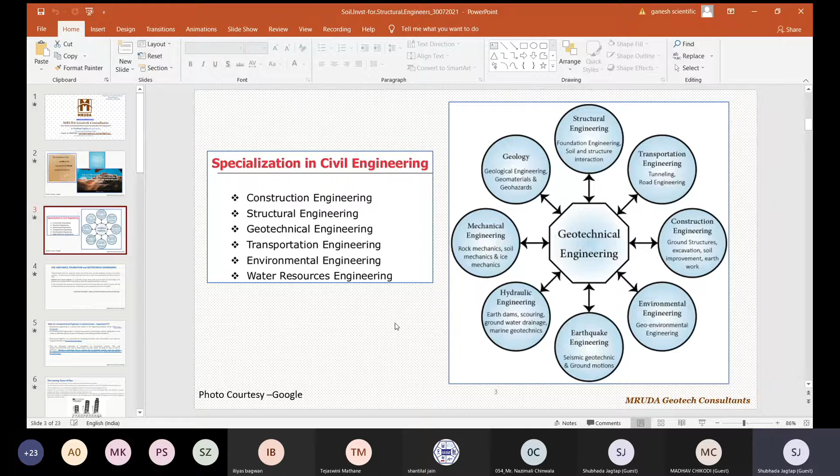So soil mechanics - engineer Karl Terzaghi is known as the father of soil mechanics and geotechnology. This is the base subject for geotechnical engineering, and he very well said that natural soil is never uniform, and to study the soil, it is not only the technical knowledge that you need, but your judgment and your skill sets are also required.

So yes, geotechnical engineering is a very beautiful subject and challenging too. Yes, geotechnical engineer's role is very much important in construction nowadays. In past few years, we saw many cases of failure all over the world, and at many places we came to know that proper soil investigation or proper geotechnical design was not considered, which led to further hazards.

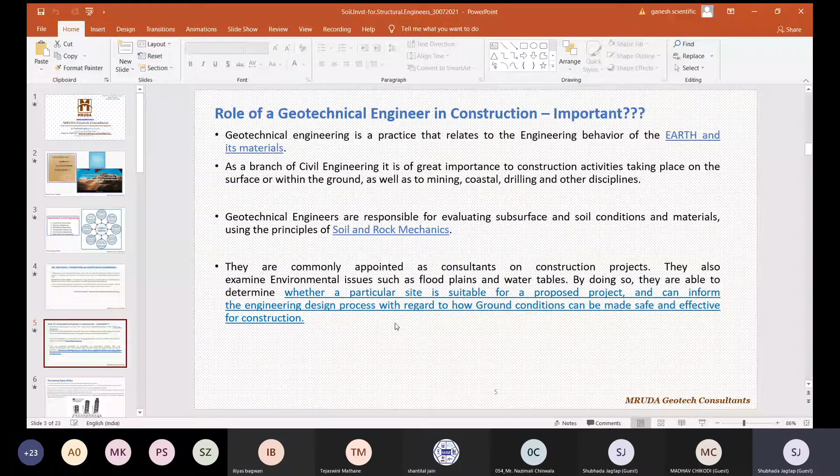Okay fine, so I will come to a very world famous example of the Leaning Tower of Pisa. Why? Because then we will move on to what was the soil stratum below as a foundation of this particular structure and why it tilted.

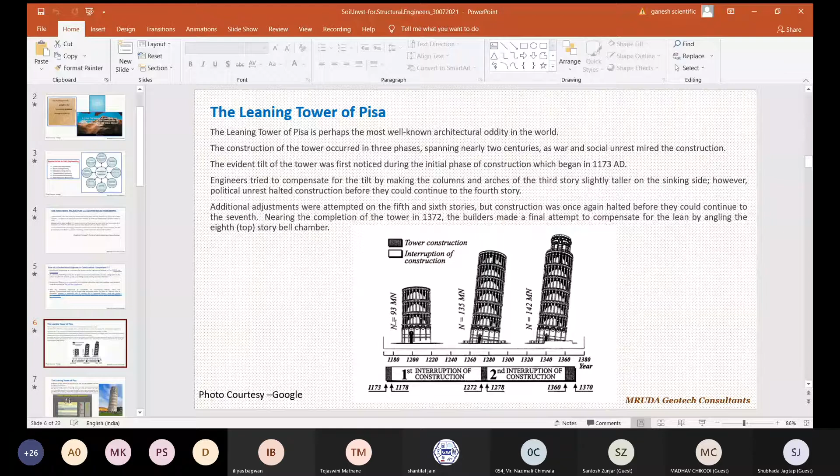So you can see the construction of this tower started from 1173 and ended at 1370. So over two centuries it happened, but in steps, because after building almost 3 stories it started tilting, and its tilting continued, and the engineers built it in stages over 200 years. Careful monitoring of this tower didn't happen till 1911, that is 100 years back. They gave real importance, and investigation started for this, how to stop it - at least it should not fall.

So if you see the subsoil profile and soil properties below this tower, you can see this Pisa, very well known tourist place in Italy, very near to the seashore. Your groundwater table is very high, sea level, and sandy clay silts, upper sands, which led to the settlements. So I would say that soil investigation, if it would have been done in that era - I don't know whether it was available that time or not - but it could have come up with the possible settlements which may happen, and this may have been rectified at that time only. But nevertheless, importance of understanding the soil stratum before building any structure is very, very essential. This is the masterpiece example of that, I would say.

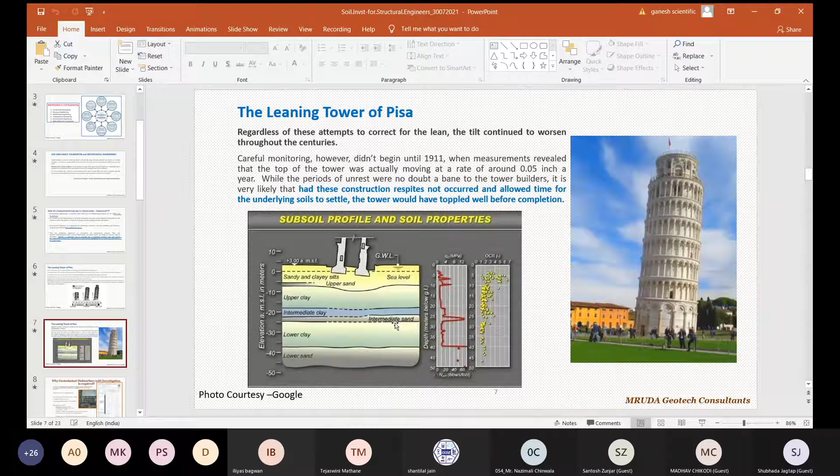Now, why geotechnical or subsurface soil investigation is required? To determine the stratigraphy and engineering properties of soil underlying the site, so that safe and economical foundation can be designed. Now, as an engineer, for all of us, in designing, safety is the foremost criteria. The first criteria is safety. That's why we have all these IS codes.

Sometimes we have to refer BS, that is foreign European or American codes for some aspects, but we have the rules or the clauses by which we go for the designing, and everywhere safety is the foremost criteria, and it should be. But while working on the projects, when you deliver some design to your client, they also want the economical solution. So it is our skill to balance both things, keeping safety on priority.

Now, suppose a structural engineer goes for a project only assuming some value of SBC, like usually it is taken as 15 or 20 or 25 ton per meter square. We really don't know from where these figures have come, and you proceed with the designs. On a later stage, when excavation starts, whether it is just a simple foundation and the upper stories, or you have to go for basements or basement parking or anything, after the excavation, engineers face many surprises. He had assumed something, and there was on site something different.

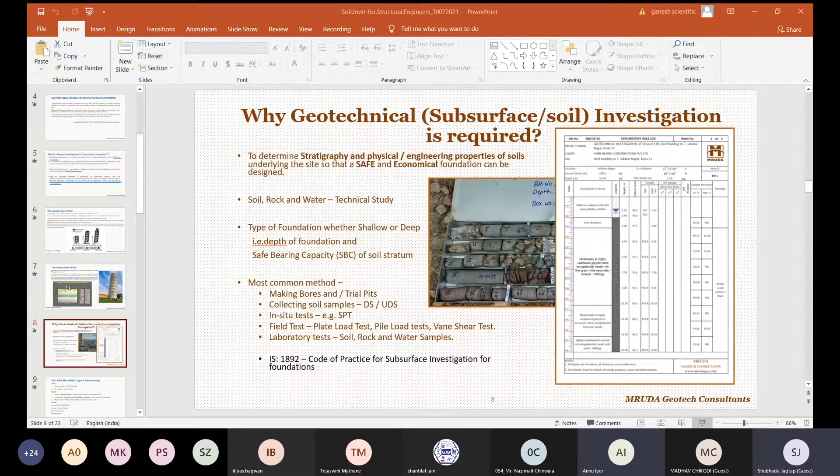Shubhada, are you moving the slides? I can see the same slide on why geotechnical investigation is required. I think I'm playing the slideshow using this icon in the PPT. When I play this, the slides are not moving, but if I just position the cursor, it moves. Yeah, now it is not slideshow mode, I'm just clicking on the slides. Okay, anyway, we will move ahead with this.

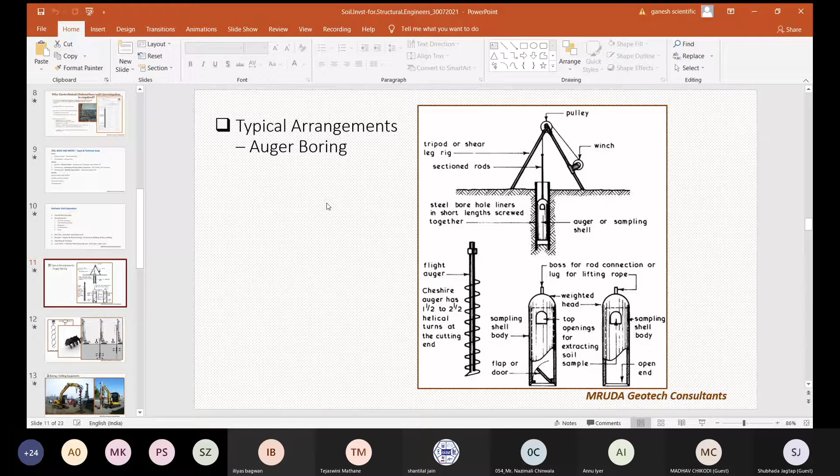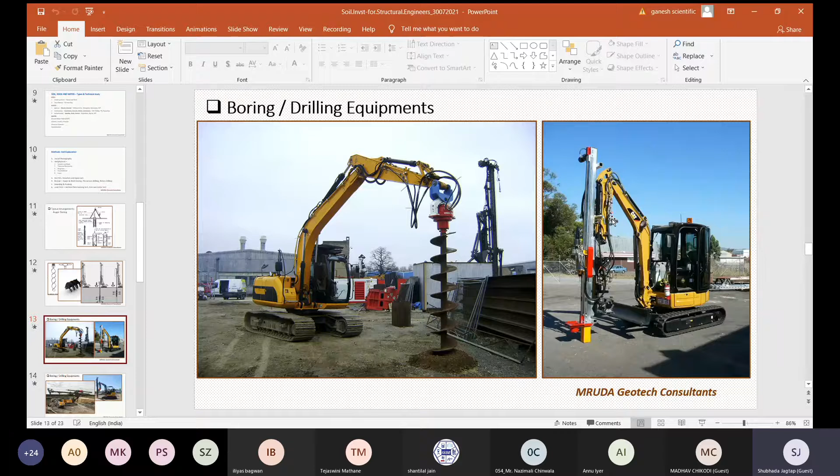These are various tools used for boring, and these are the machineries - hydraulic rigs, crawler mounted, truck mounted - whether you have to go for vertical drilling or inclined drilling, anything is possible. Now, we typically know the types of shallow foundations.

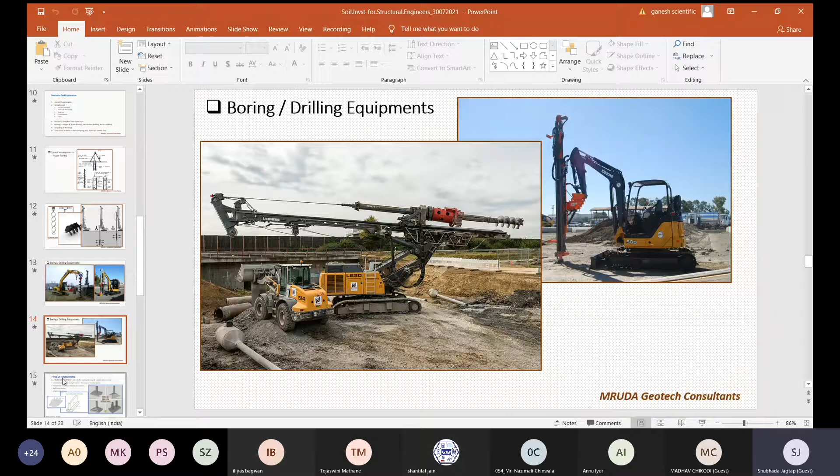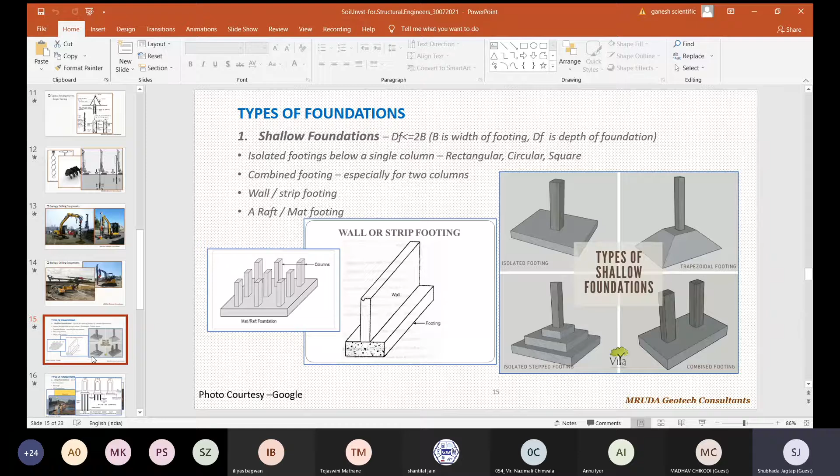Yes, spread footing, isolated, trapezoidal, strip, or mat or raft foundation. Secondly, the most important is our deep foundation. Here on the right side slide, you can see the same type of structure given with different types of foundation systems. The first system shows a pile foundation, pile resting on a hard stratum, and your settlement is hardly W1. But when it is the second system, piled raft foundation...

Ma'am, you're not audible, ma'am. Hello? Hello Shubhada, we are not able to hear you. Ma'am? Just wait, I'll call her.

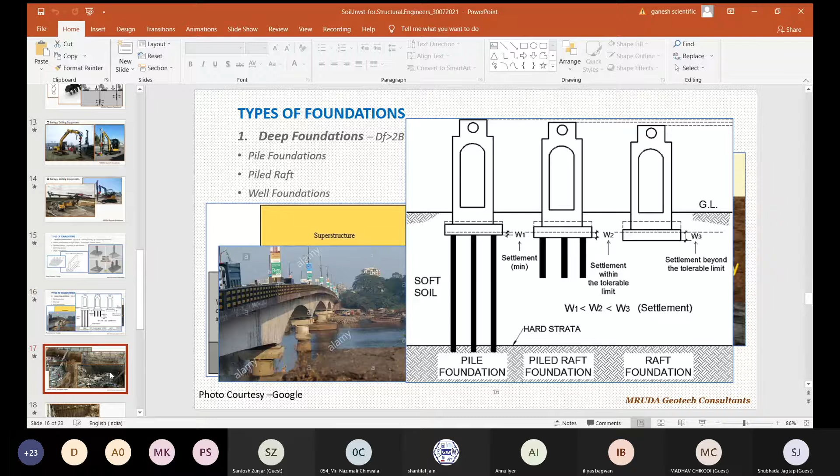Yes ma'am. Okay, so moving further, I just want to give the example of this particular site. This is a local site in Dombivli. I won't give any details of the client or whoever.

They first approached us for the soil investigation. When we told them the minimal cost of it, they really ignored it, saying we have done many constructions till now, and we will directly go for the excavation.

It was a 7-story building with basement, and they directly went for the excavation without any support, without doing soil investigation. They had no idea what stratum was lying below their proposed building. Then one day the phone comes from the client: madam, something has happened on site, please come.

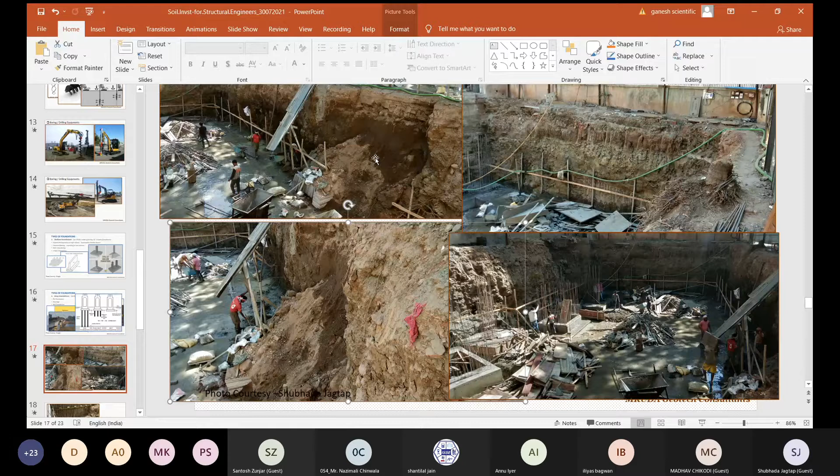Also, their soil stratum was loose, and we gave them some solutions to go further. Luckily, no major incident has happened on this site, and now it is standing good.

But the point I'm showing this particular case study is that the cost of the soil investigation as compared to the cost of the complete project of any construction is very, very, very minimal. But it is very important as it gives you a clear picture of what is lying below and how you should move further, because foundation is very important for your building.

If it is strong, if it is resting on a firm strata, or if firm strata is not available and you are taking your foundation deep down to a firmer strata, or even if not that, you are doing ground improvement and then resting your building on it, yes, you are at peace of mind because you know your foundation is strong.

And not only for the superstructure did you refer the codes and do all the exercise, but for the foundation also you did the same, and your structure is safe. So this is most important, I would say. Everyone should go for it.

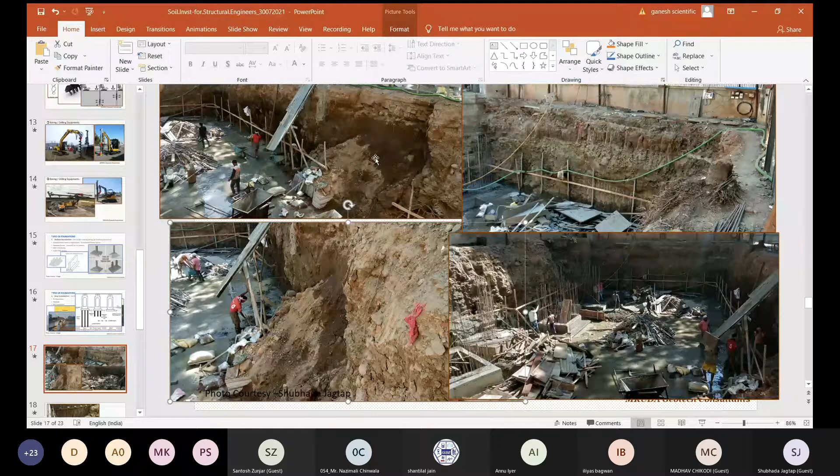This is an integral, very important part where you want to go for very deep excavations, especially almost all cases in Mumbai are like this, a minimum 3 to 4 levels of basement parking and then the superstructure. So here they had consulted us to take the rock cores when they reached the foundation level, and this design was already done, but it was done with proper investigation and consultancy.

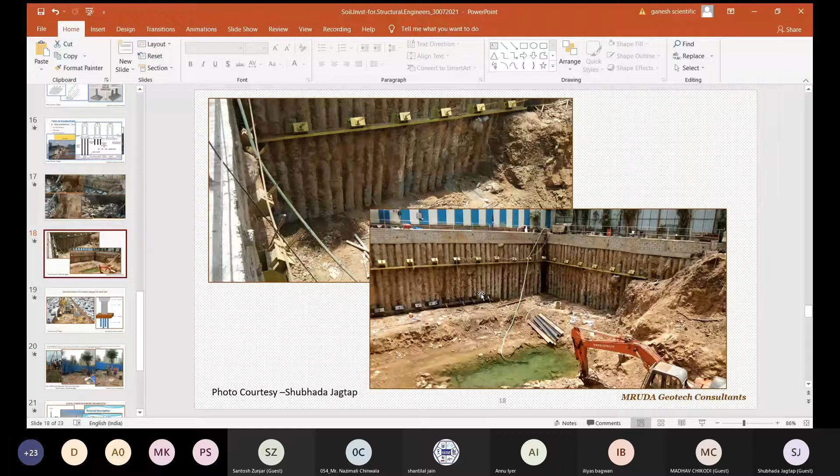The Mumbai Metro project, yes, you must have all seen it going on everywhere, the elevated metro work. Each pier, roughly 25 to 30 meters center to center, is resting on a pile foundation, mostly the pile foundation. So Mruda Geotech Consultants has worked on one of the metro projects for the foundation system of this pier.

We were in line with the structural engineers appointed by the main client. Here everywhere we could decide the depth of the pile, the diameter and everything safely and economically, just because the investigation at each pier location was done. Almost one package of the metro contained 120 plus piers and 120 boreholes were taken, because it was mandatory for each pile, for each pier, there should be a separate borehole.

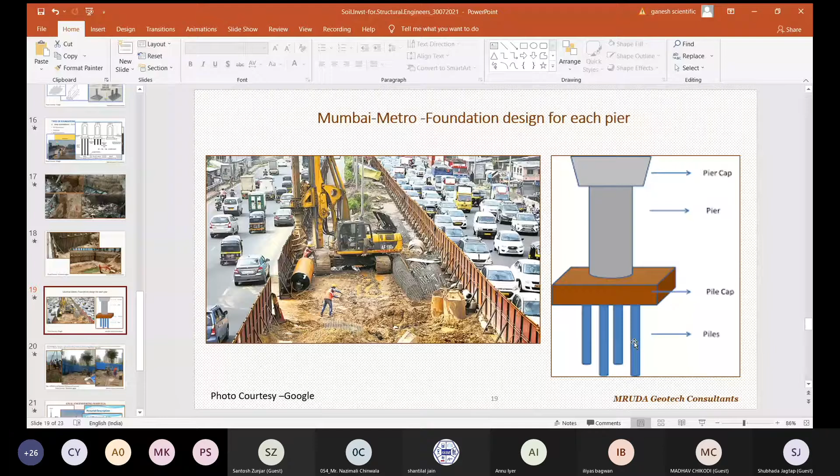So yes, for important projects like metro or the Bandra Worli Sea Link project or any other project of high importance, these are mandatory and rigorous. We have given pile depths as deep as 25, 30, 35 meters below the piers of the elevated metro. This is that case study I was telling about, the Mumbai project, where we did the investigation as well as the plate load test.

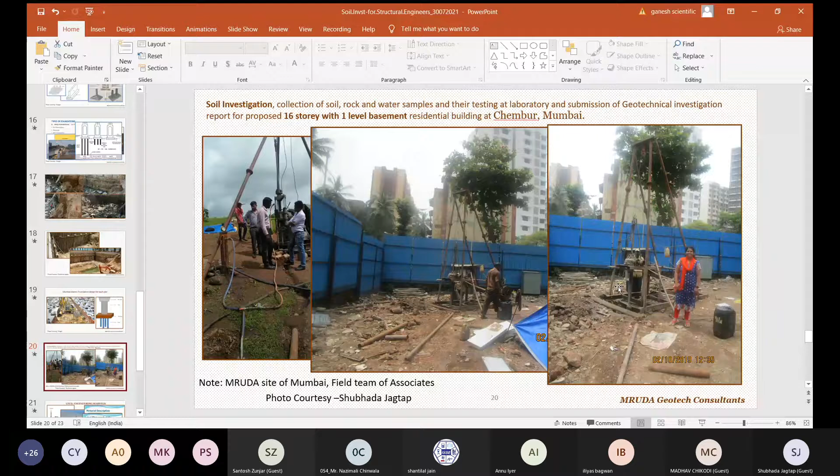A team of civil engineers worked hard for it, and you would be surprised that only the soil investigation of this particular structure took place for 6+ months, and the excavation and all those activities for doing the foundation took something around 2 years.

So what is the point to highlight here by showing the Burj Khalifa example? This is the foundation. Why the importance of foundation? Because to make the tallest building, as high as 818 meters, you must have a strong foundation which reaches a firmer strata, which will distribute the entire load of this structure evenly. And in spite of having a weak soil, you can build such a structure. So here, definitely the investigation would have been rigorous, and it helped a lot to RCC and structural designers and architects to build such a high structure.

Next, we move on to a lecture presented by us at Sardar Patel College of Engineering, for second, third, fourth year students. Mainly the subject was soil investigation in detail. The lecture went well, and to understand how soil investigation takes place on site, we could arrange a site visit of the students to one of the metro projects going on in Mumbai. This was in 2019.

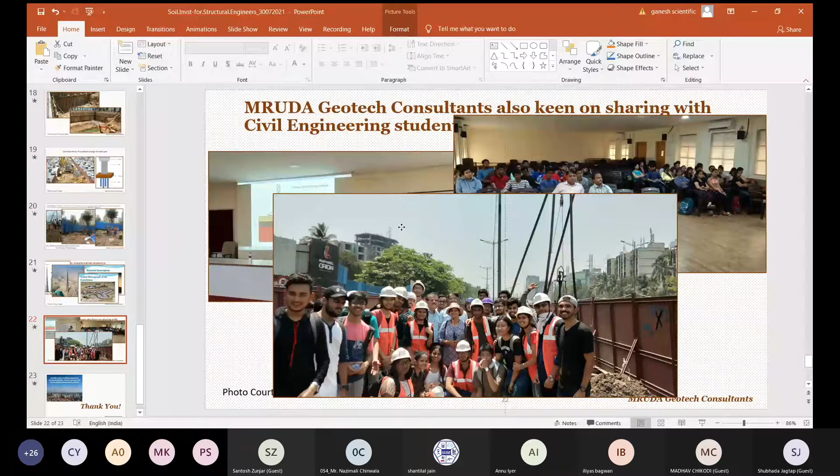So here, as a geotechnical consultant, it is not only the geotechnical engineer who is important, or only soil investigation that is important, but we all know it is teamwork. In civil engineering, without teamwork, we can't achieve any milestone. Even to come up to the plinth, we have to have a good foundation, and it should progress well. If any geotechnical or soil related queries or problems arise on site, you need to call upon the geotechnical consultant. Then after the plinth, you go for the superstructure, and even superstructure design is tedious, requiring thorough knowledge of all design aspects as well as IS codes.

So it is teamwork, whether it is geotechnical engineering, structural engineering, RCC consultancy, estimation engineering, or quality control. It is teamwork, and it is strongly believed, and proved, that we need each other to complete a project.

So it is a sincere request and a message too, that when you step out of college and go to pursue either your master's degree or directly start your job, remember that geotechnical engineering is also an integral part of civil engineering for any construction project. Instead of assuming any XYZ value as an SBC, it is always better and recommended to go for a thorough soil investigation, depending upon the size of the project, the size of the plot, and what kind of construction you are going to do.